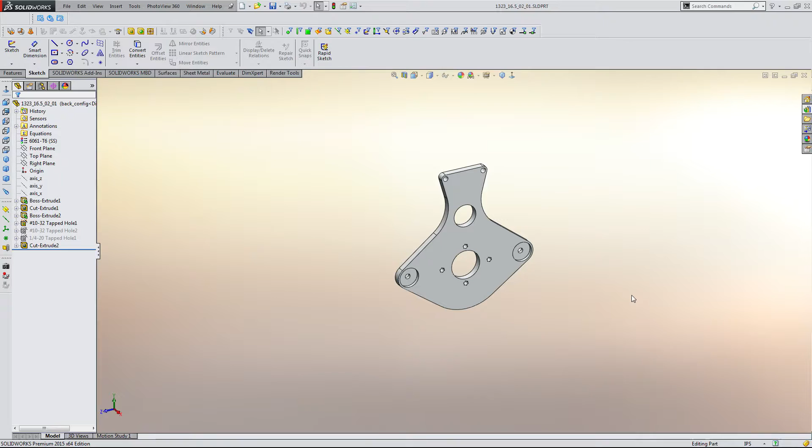I've taken a week or so break from this because I've been pretty busy, so I need to catch up on what we did last. I think, just judging by the fact that I haven't closed my SolidWorks window since then, we just made the gearbox plate. It's a Flipsim gearbox. Okay, yeah, now I remember. And next step is making the assembly. So I'm going to go make a new assembly.

If I remember correctly, I don't think I added the counter bores until after the video because I forgot about them completely. So what you see here is these little indents. Those are 0.755 diameter circles that were cut out by 1/8 of an inch in the 1/4 inch plate. What that accomplishes is our standoffs that will be holding two plates together are 3/4 inch outer diameter, so it fits in there pretty snugly and helps align the gearboxes and make sure everything fits nicely. It's a good practice we like to do.

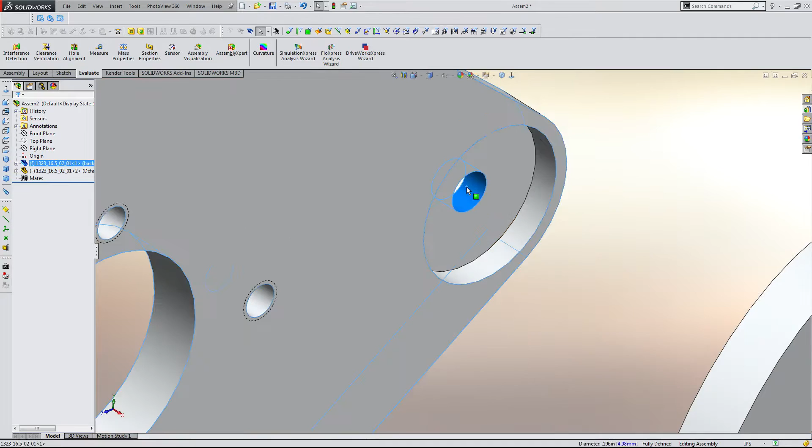I forgot to put it in the last video. I just remember very distinctly that I ended the video and I realized I didn't do it. I didn't have time to make a whole other video, so I just wanted to fix that real quick. So it's one of the few things where it's actually not in the video itself. My goal is to get the entire process within the video.

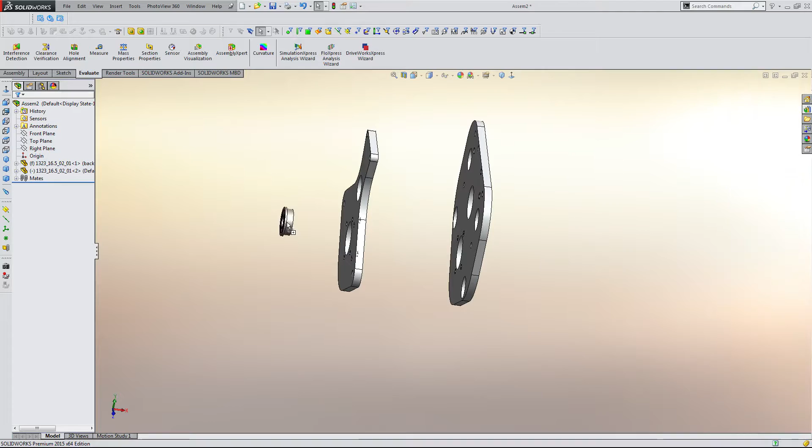Alright, so I get my plates aligned. I'm going to put my bearings in. Is that it? No. They are 3/8 ID, 7/8 inch OD. Cool. We can use a smaller bearing on the end because nothing's going to go through it. But we do need a larger bearing on this plate because the shaft is actually going to go through it. So you can have a 3/8 hex going through this bearing right here, and we're going to turn it down to 3/8 round so it can go in there.

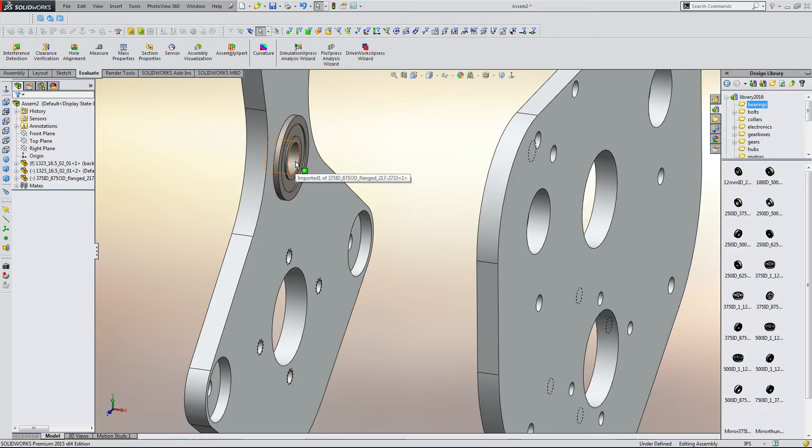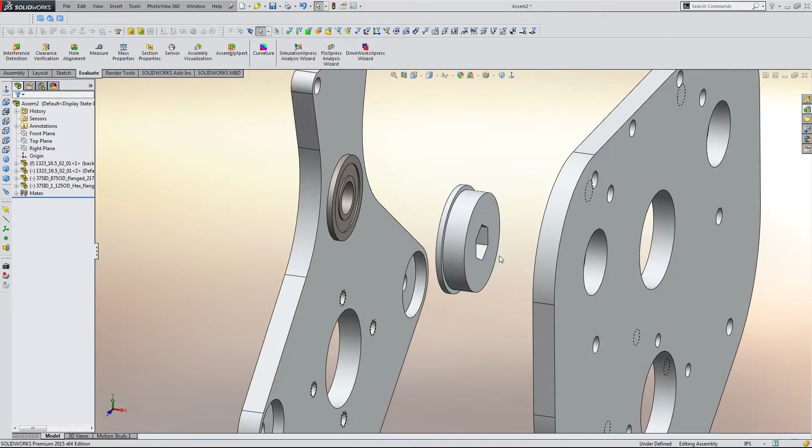Alright, now where's 3/8 hex? Oh, I wish there were 3/8 thunder hex. SolidWorks does a weird thing where it auto assumes the mates, which I guess could be useful, but not what I'm looking for. It's cool though, I can work with it. Also for aesthetics purposes, because I don't use that bearing that much, I haven't changed the color yet. I just like all my bearings looking the same.

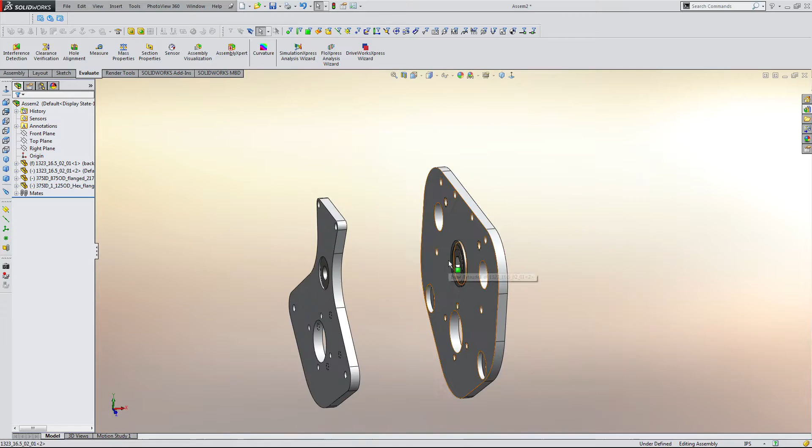Continuity purposes. So you noticed I put the flanges on the inside of the gearbox plates, and the reason is, butting up against this flange here, I'm going to have 3/8 hex going to 3/8 round, so the bearing can't go past the 3/8 hex, and that's going to geometrically retain the bearing over here. On this side, I'm going to have 3/8 hex going through 3/8 hex, and that's not going to retain the shaft or the bearing.

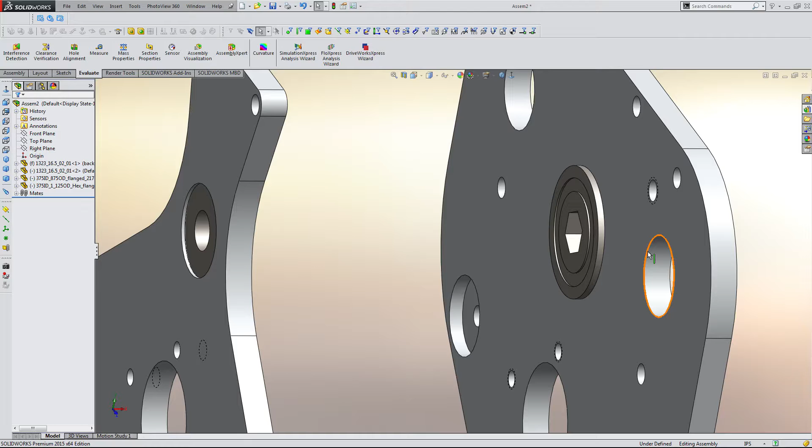So what I'm going to do is a snap ring or shaft collar, something super simple. I'm leaning towards snap ring because I think it can work. Just at the right distance, doing so will prevent the plates and the bearings from going any farther in, and the standoffs will prevent them from going any farther out. So that'll be a nice way to retain things. Alright, so bearings up there look pretty good.

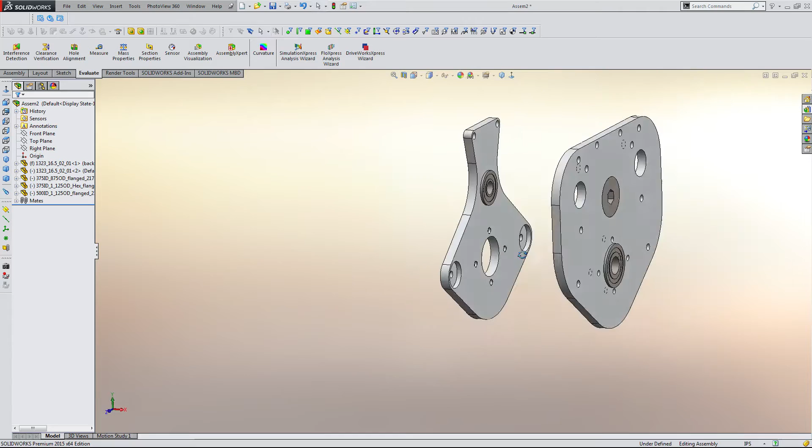On the bottom, I'm going to be running just a standard West Coast Products shifting shaft. So I'll have a 1/2 inch round on the bottom. And that second spot here actually won't have a bearing at all because that's where the bearing block is going to mount to. I'll be getting to that in a bit. But right now, let me get my gear set up. Or actually, I'll start with the shaft.

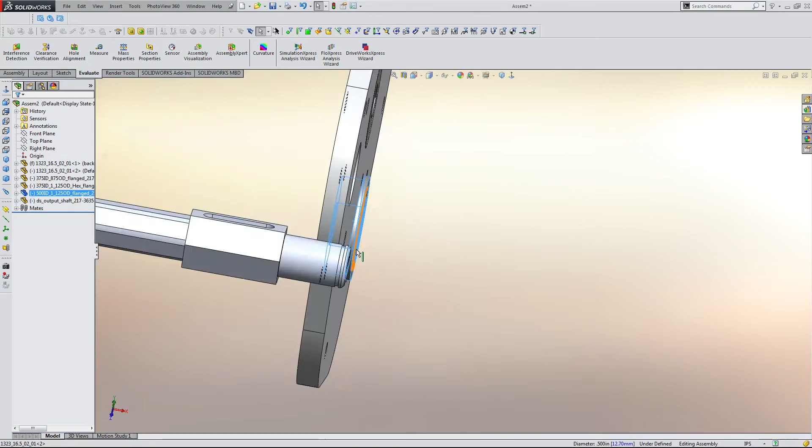Alright, cool. I'll start with basic thunder hex, and I'll cut it off later on. So there's the snap ring groove right there, and that's going to be just about coincident with that plate. I'll make those concentric. Now I need a 1/2 inch round bearing with no flange. Alright. Cool, radial.

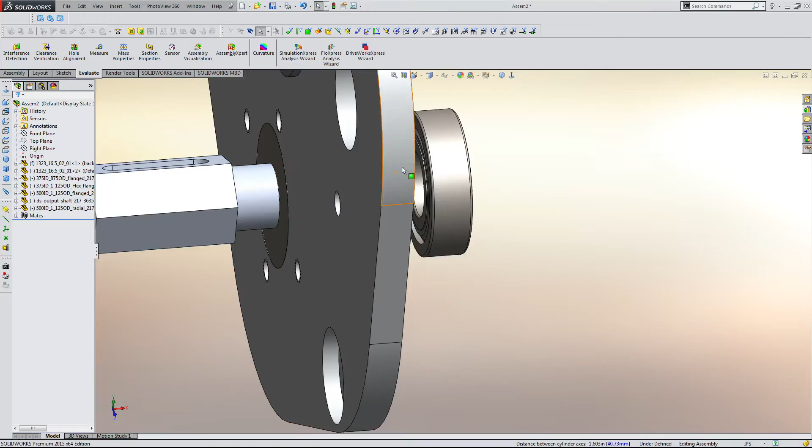That'll work nicely there. And there's a really thin washer that's supposed to go in here, which I should put there, it'll show it. So there's a little bit of space in there, it's a few thousandths. I'm not going to model it because I don't like doing that. But you can. Just know that it's there for a reason, and you do need it in your actual design.

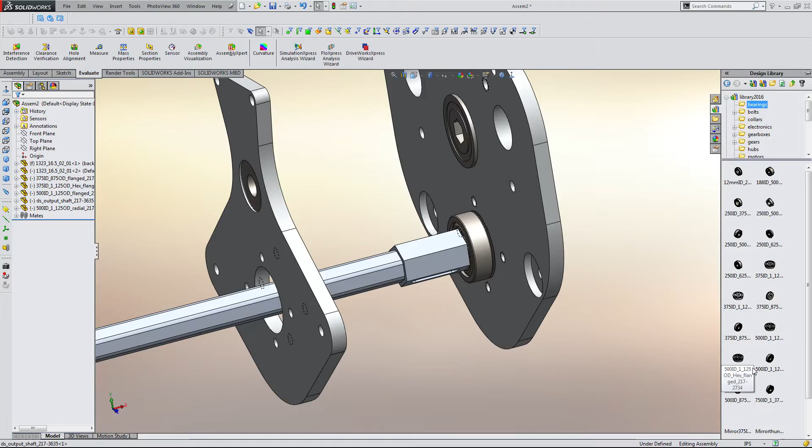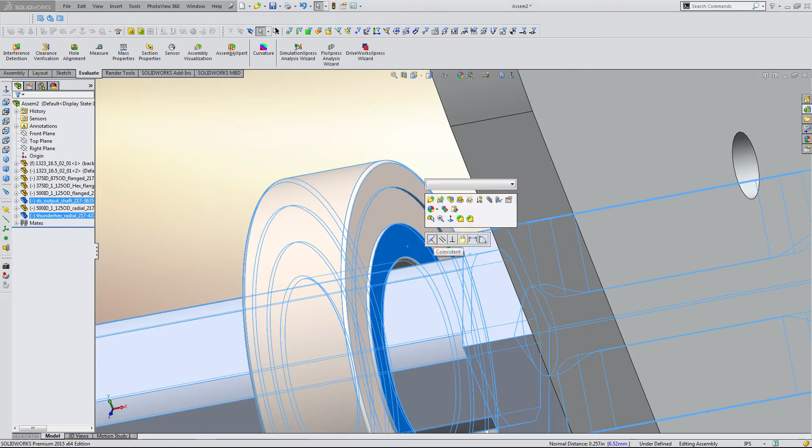Next, I have a radial thunder hex bearing. Most of the time, on traditional gearboxes, you'll use flanged half-inch hex because this is not normally thunder hex, the output shaft, but we would machine it to be thunder hex in this case because that's how I'd like it. That's going to let us use a thunder hex radial there and avoid a hex bearing. Try to use those as little as possible.

And now for gears, do we have... Okay, I do not have those saved. So from the last video, I determined I'm going to use the 54 and 64 tooth dog gears that 1323 used last season. Pretty sure those aren't going to be on the market. Just going to put that out here right now, so it's not like it will be a future COTS item. But I know my team's capabilities, and I know what we can machine, and I know that making a new dog gear out of any gear that we want is pretty easy for us. So I'm going to go pull those out.

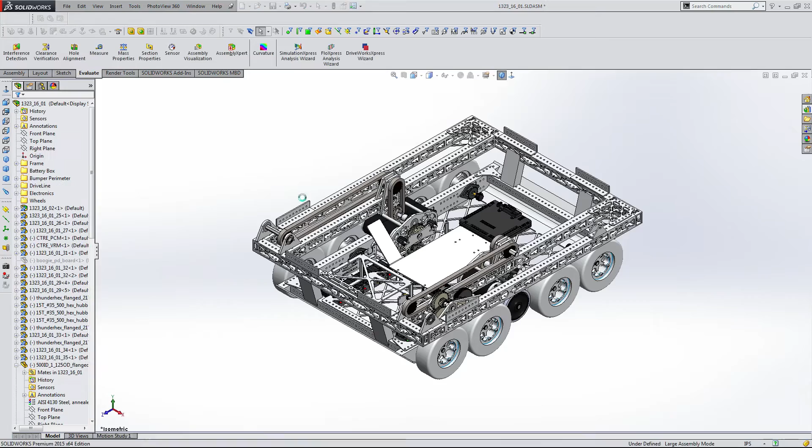Where is drivetrain? No, is it 01? I think it's 01. Nope, that's the entire drivetrain. Oh well. I'll just pull it from here. Little load. There it goes. So that's my 64 tooth. I'll just save that over to my project.

And because it is a custom part, I could use the actual name. Actually, there is a naming convention we have for modified COTS parts, and I'm going to stick with that just for continuity purposes. What I was going to do is just make it my own custom part number, and then I would know in the back of my head what it is. But if someone else wanted to look at the CAD and didn't understand what was going on, it'd probably be easier to keep this naming convention, which is why we use it on the team. So cool, that's going to be our 64 saved there.

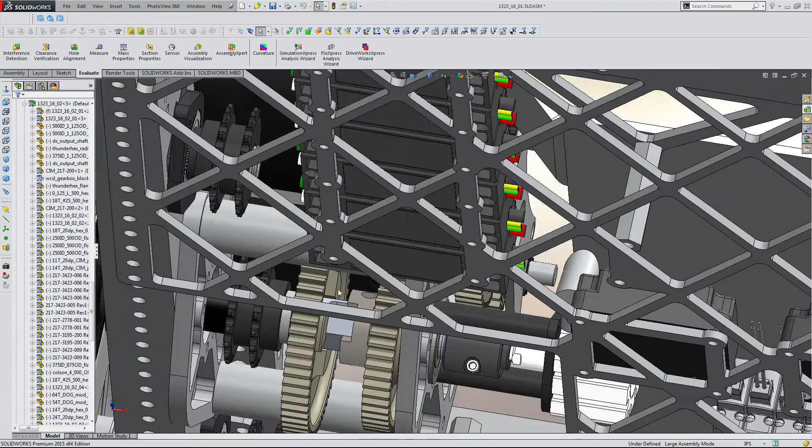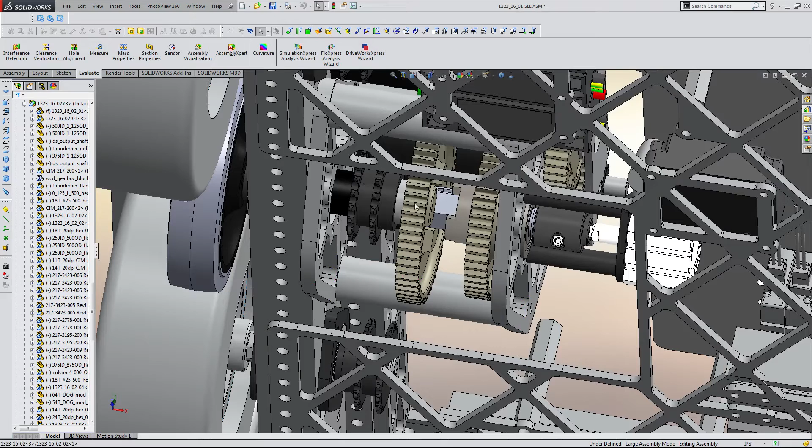And then do the 54 saved here. Let's see, off-season drivetrain, 02, everything good there, save, nice. Okay. So I think we're good here. Should be. Actually, one second. So this is really similar. I just want to see what's the spacing we used here. 2938. That's a weird number. We had a reason for spacing it like that. I think it's more because of our PTO on the top. So I'm gonna say I don't need to use that spacing.

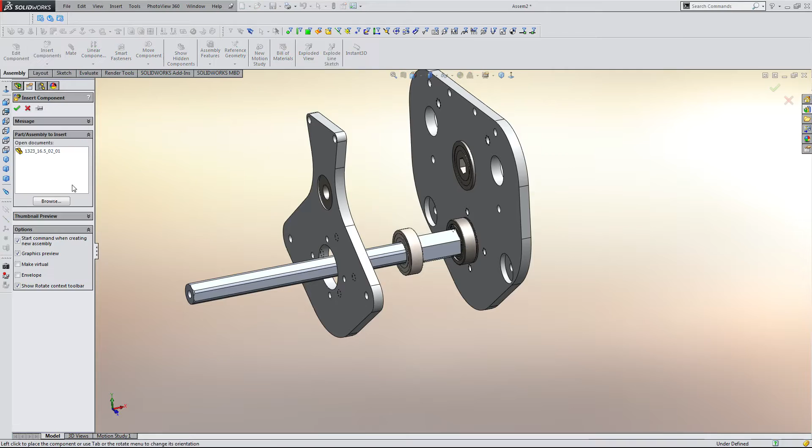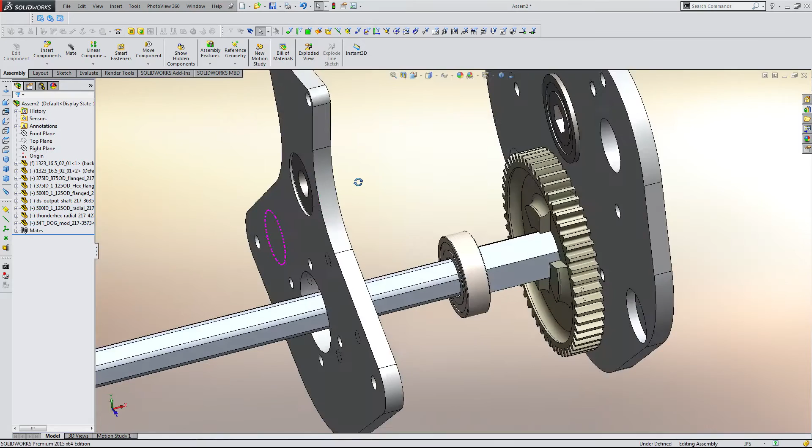I don't really know what spacing I'm going to have, but I don't need to know until I have everything figured out. So I'm going to insert my two dog gears. So put the 54 on the inside. And I believe the reason we put the large gear on the outside is because, depending on how you plumb your pneumatics, it makes your default gear high gear, so that when you're pushing your robot on the ground, you're not pushing against a larger reduction. That sounds right.

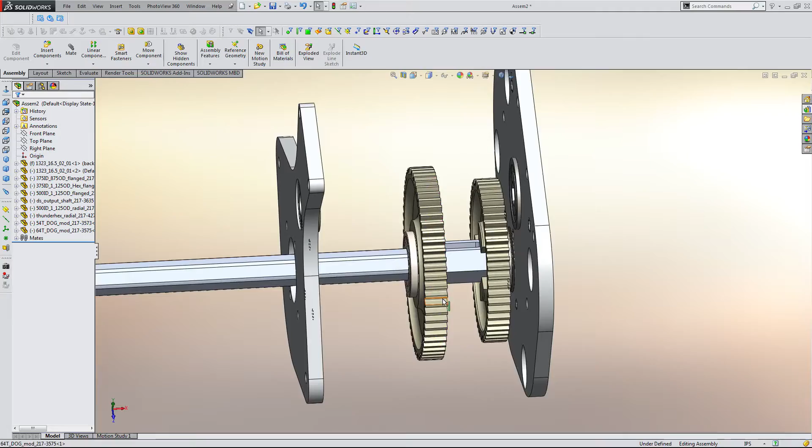Plus, I think it just packages it a little better for a lot of the stuff we do here. So those are our two dog gears, or dog pattern gears. Normally we'd have the actual shifting dog in the middle. I don't model it. I just know how big it is and if anything would get in the way. There would be nothing in this model that'll get in the way. If you want to model it, that's up to you. There's no harm in doing so, but I don't see a need to do it.

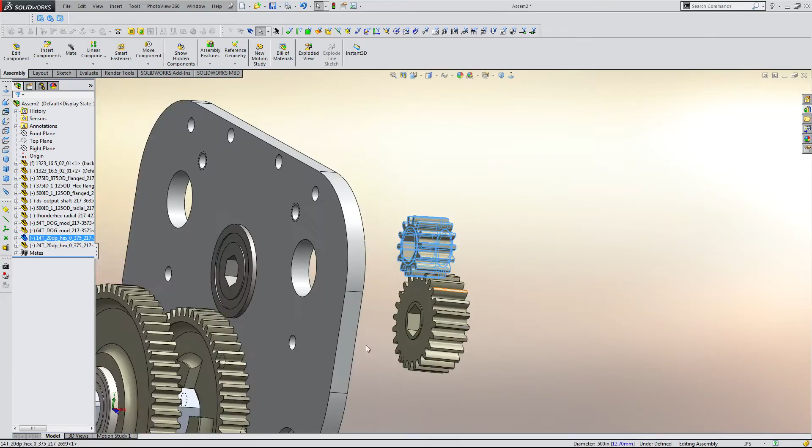So now we go to our 3/8 gears, pull out the hex, 375, 14 tooth, and the 24. I believe that's what we used. They seem off color, or maybe these are the right color and those aren't. Maybe they're all the same color, and I'm colorblind. Cannot tell yet. Okay. So just because mating round with round is a lot easier, I'll mate the inner part of the bearing with those spacers right there. And then I'll just drag these to approximately the right places.

And I know that there's going to be a 3/8 snap ring holding this together. So just for purposes of spacing wise. So yeah, 3/8 snap ring. Let me check McMaster. I think it's an 0.020 thickness. Gonna double check though.

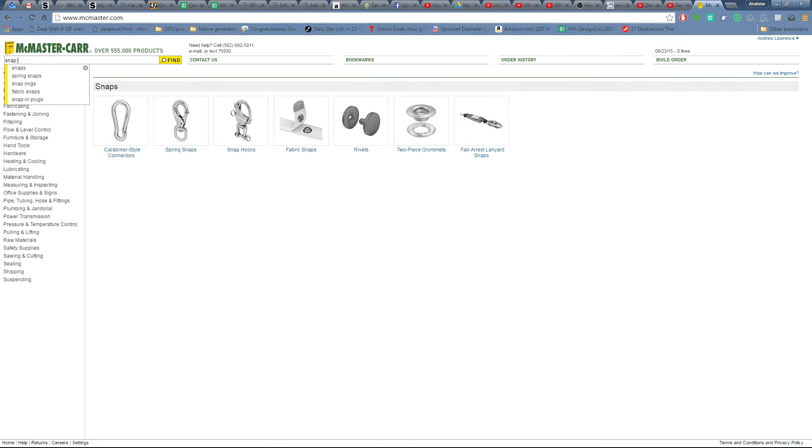Let's see. I don't think you can see this. I think I don't have it set up where you can only see my SolidWorks window. So if you're not watching with sound, which I don't know why you would do, but if you're not watching with sound, you see nothing going on. That's probably why, because you're not seeing the right window. But then again, if you're not watching with sound, you can't hear this explanation either. So yeah, it's not too helpful.

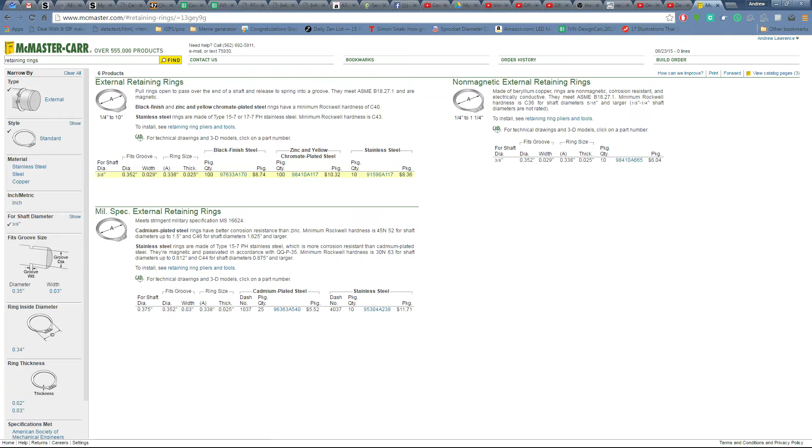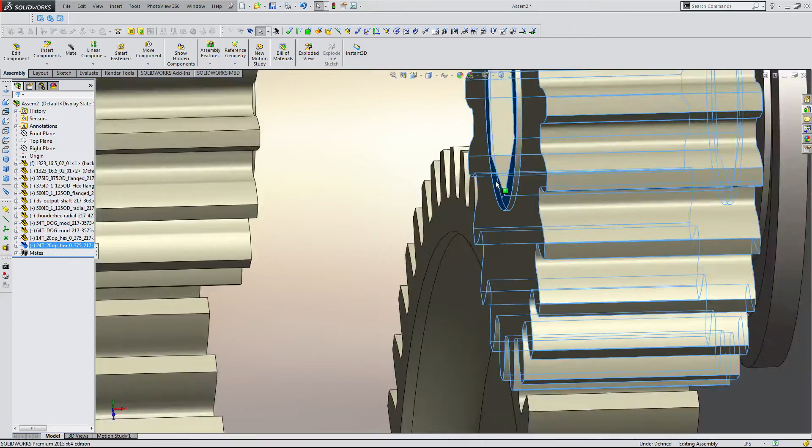Okay, so I was wrong. It's 0.030 for 3/8 snap rings. So I'm going to space this 30 thousandths off from the edge, which will work out pretty nicely for me. And now I'm going to see how far is this approximately, because if I can, I'd like to just use a spacer that already exists there. So it's at 0.574. I could probably just use a 1/2 inch spacer, because those are already readily available.

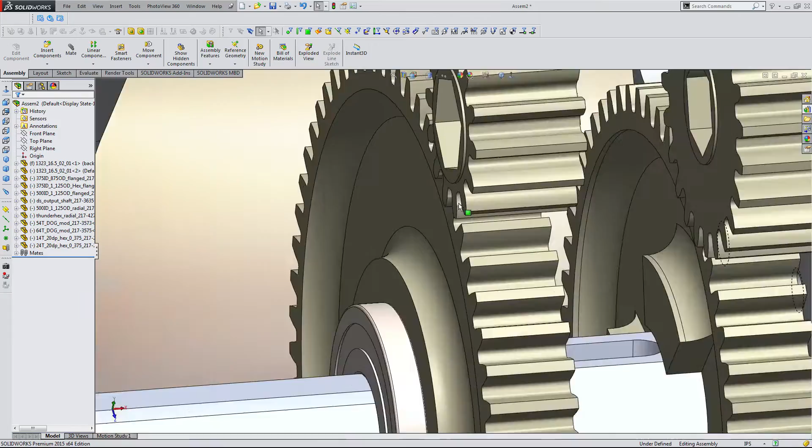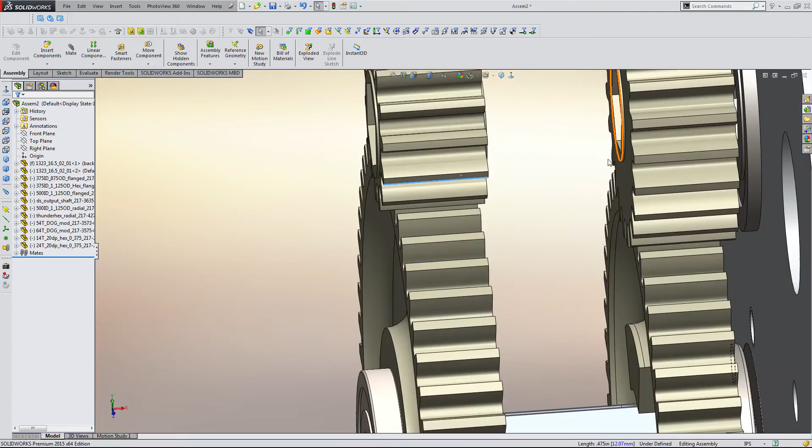Not as much contact as I'd like, I'll be honest. So what I'll do instead is I'll see how far it is from here. No, actually, I don't want to see how far it is from here. That's dumb. I want to make this off of the gear that already exists, because right now I don't know what my distances are. I don't know where this is relative to that plate. So if I don't know that, I need to make this relative to this. So I'll say 0.6. Yeah, seems good to me.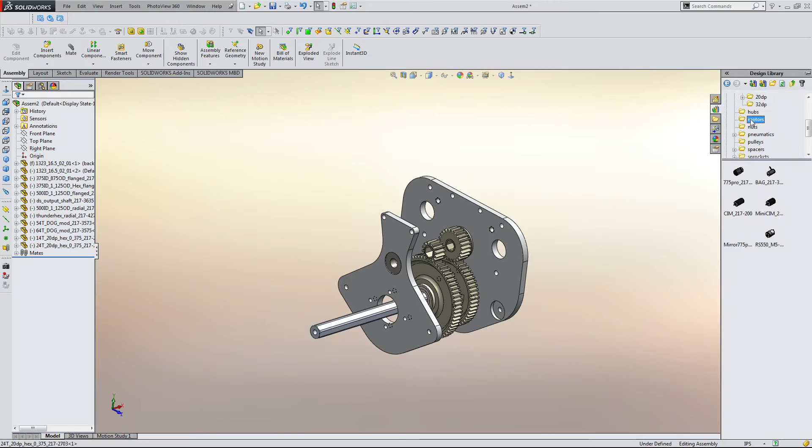Alright, so I have my 3/8 gears. Now just to make sure I did my math right in my modeling, I'm going to put in a motor. Get a CIM. And if I did this right, which I'm hoping I did, there should be enough room for my 2 gears on the inside. Alright, that's nice. Cool, exactly as I modeled it. So we do have a nice bit of space right in here, so our gears will not contact our motors.

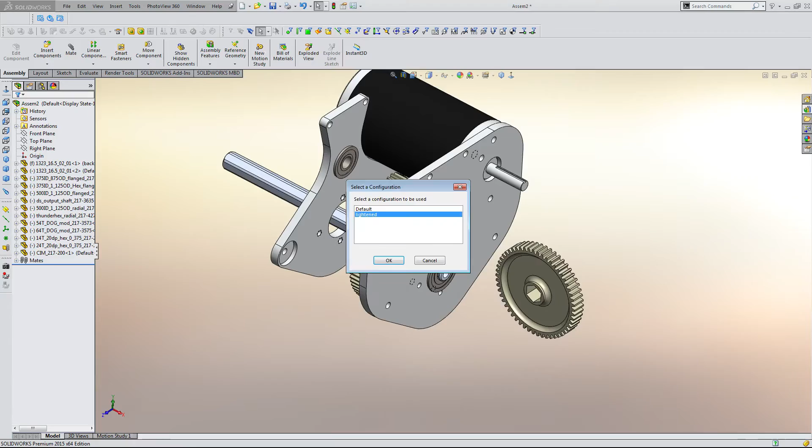Let's see, now on the outside, 20 DP. I'm going to go to 1/2 inch hex, and this is going to be a 54 tooth gear. Ooh, I have a lightened model? That's nice. Forget when I do that to myself. Alright, make it concentric there. And I'll just make it coincident there. That's usually pretty fine.

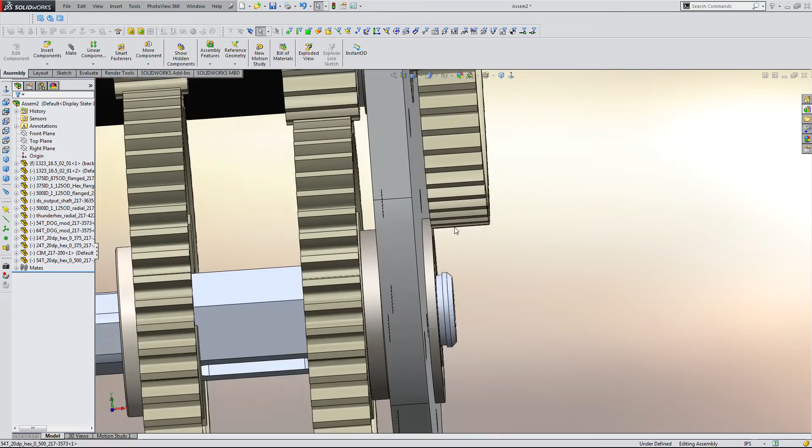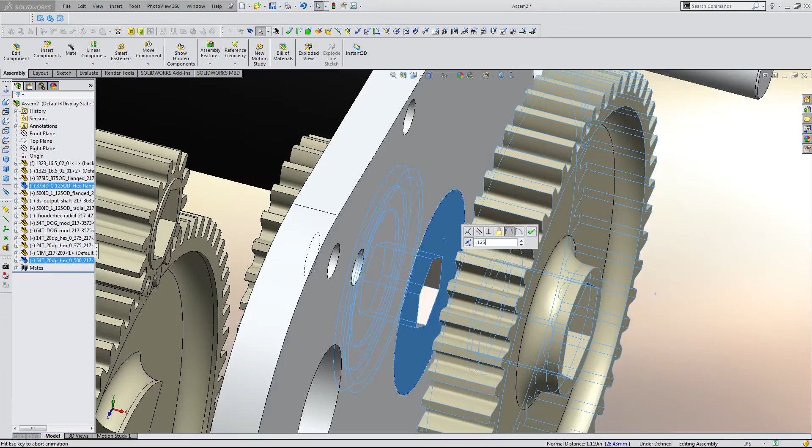Okay, but that would interfere there. So, cannot do that. Plus, that would move the bearing, or not the bearing, but the bolt that holds in that bearing. Or now there is no bearing holding in that bolt. No, is there? There should be. Yes, there's bearings. Okay, I'm confusing myself. So, I'm going to put this out some trivial amount, like, I'll put it out 1/8 of an inch. I'll have a spacer there, of course, but that is enough to clear there. It's more than enough, and I'm hoping that I can put a bolt head there.

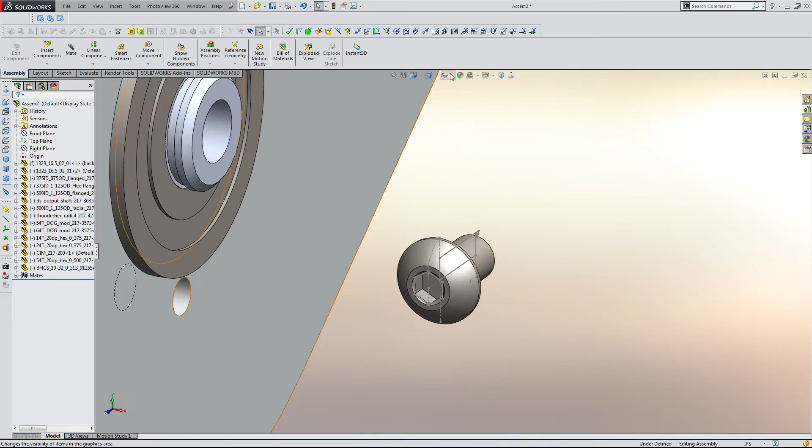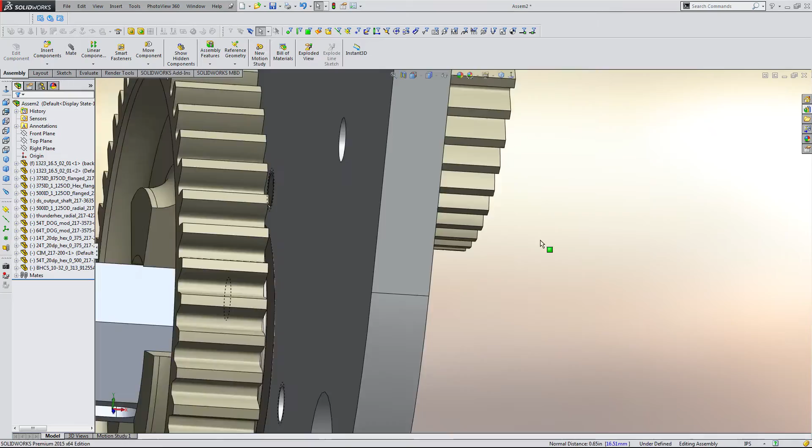So to show you what I mean by the bolt heads, I think I showed an example on the WCP DS previously, but I know the thickness of this flange is about 1/16 of an inch. So if I go to my number 10 button head cap screw bolts, I go to my 5/16 length. Okay, oh, it's too long, definitely too long. There it is. Cool. I don't know why it shows the sketch. I should be able to put that on top. Oh, whoops. I put the button head there.

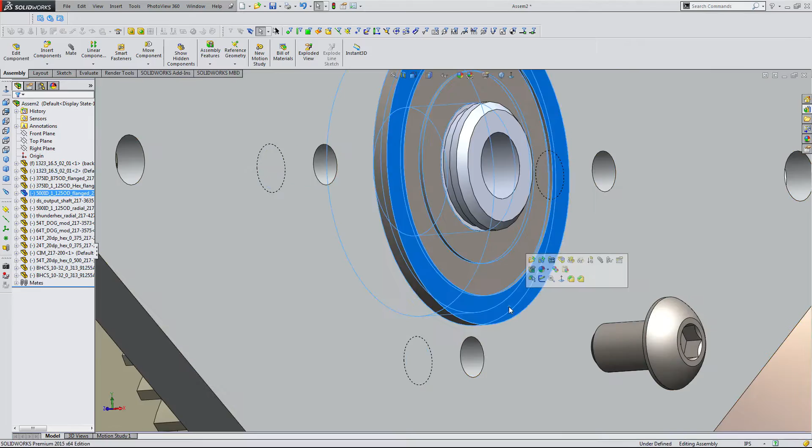Cool. So you're seeing the bolt is holding in the flange. It is not contacting the gear, and it's not protruding out the other side. Awesome. So I'm going to get another one of those and do the same thing on the bottom. Normally I've done 3. I think we can get away with 2 though. I think it's fine. Alright, anywhere else where I need to do that trick? I don't think so. No. Cool. So that works. So that's held in. Our gear's pretty positioned nicely there.

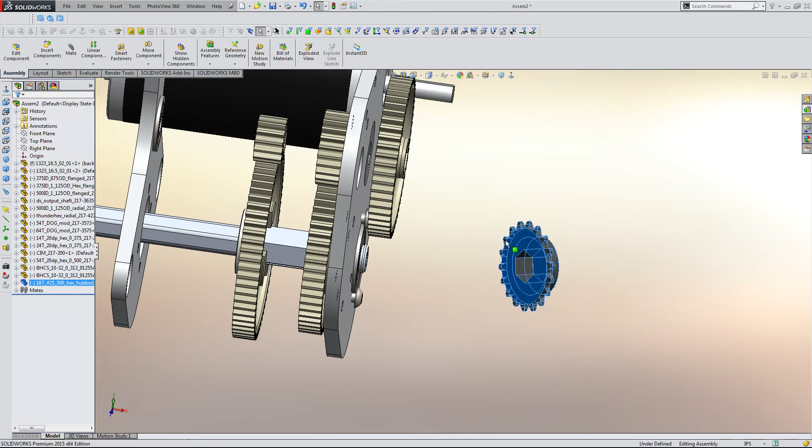Now we need to figure out our sprockets. So sprocket wise, I'm going to use number 25 sprockets, and then WCP hub sprockets, probably 18T, because that's really all we need here. You can go larger and it works. That's not too necessary. If you go smaller though, you run the risk of stuff popping off or not nice tension. So I like 18s. That's what we use on 1323. So I'll just keep doing that.

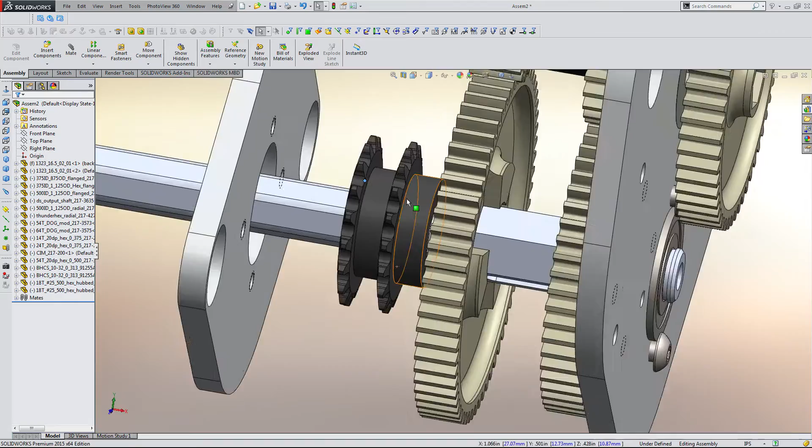Now as for where they are, they need to be a little bit off from this distance right here. But I need to fit the chain in as close as possible. So what I'm going to do, let me see, is I'm going to model my number 25 chain.

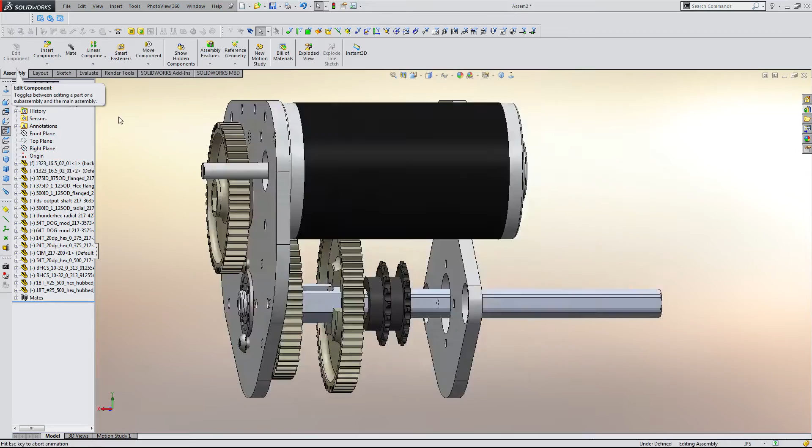I'm going to do this by going to the right plane. I'm going to start a sketch. Nope, just kidding, not the right plane. Should have been the top plane. Or front plane, that's it. There I go, cool. I'm going to draw a sketch right in the middle there. The height doesn't matter, which is why I can put it right in the middle of that tooth right there. What I care about is the width.

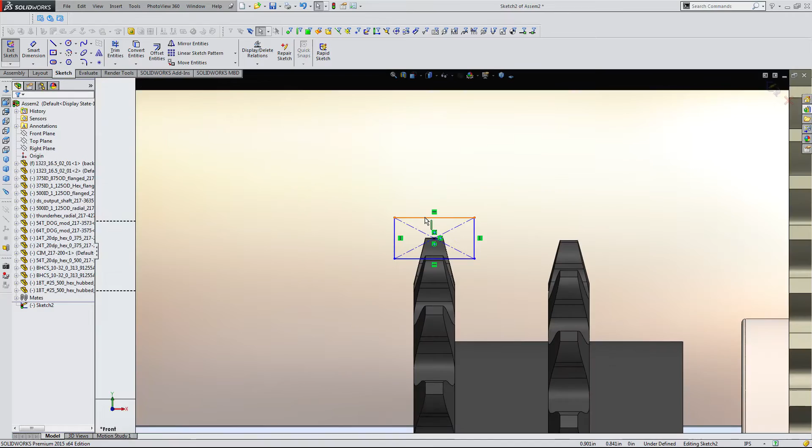So now I'm going to go online and check the thickness of the chain. I do that by going to Vex's website, because Vex Pro has their own. They sell chain there, and I think that's where we get most of our chain. And they have nice drawings. So if we go to their sprockets and chain section, it'll say roller chain. And I know you can't see this, that's why I'm saying it out loud. Scroll down to the technical specifications and say drawings.

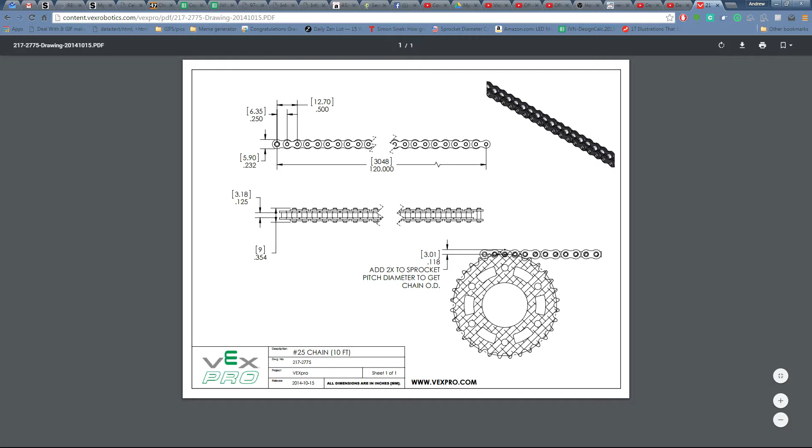And number 25 roller chain. Alright, and there is a thickness there set as 9 millimeters. Let's see. I think that's the correct chain that I'm using. Yeah. So I'll model this as 9 millimeters. I'll just denote that. My default is in inches, so if I just say 9, it's going to be 9 inches. I just put mm and I'll say millimeters. And the height I don't actually care about.

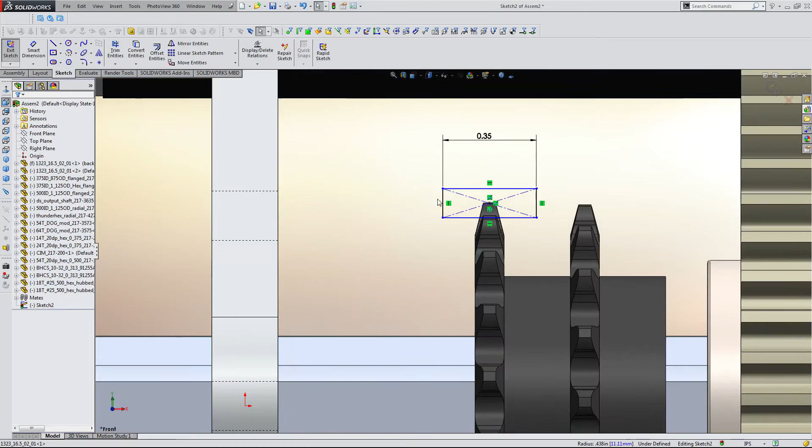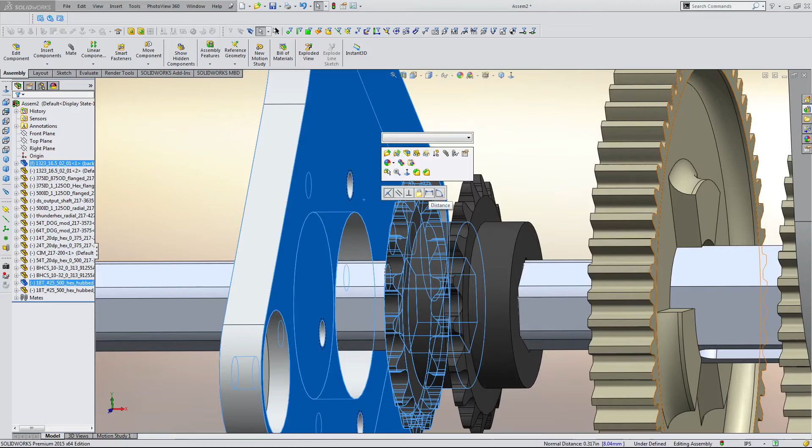So now, my goal is to make sure that, let's say, where's this face? 0.12. So I need to have at least an 1/8 inch of space between the front of this sprocket plate right here and this side plate. So that's just at least that distance, preferably more. So I'm thinking 3/16. Thinking if I have a 3/16 inch distance, that will be plenty. 0.1875. Okay, cool. So I've done my modeling, I've seen my sketch, I know exactly how much room I have for my chain, and I know as a fact of science that this will work.

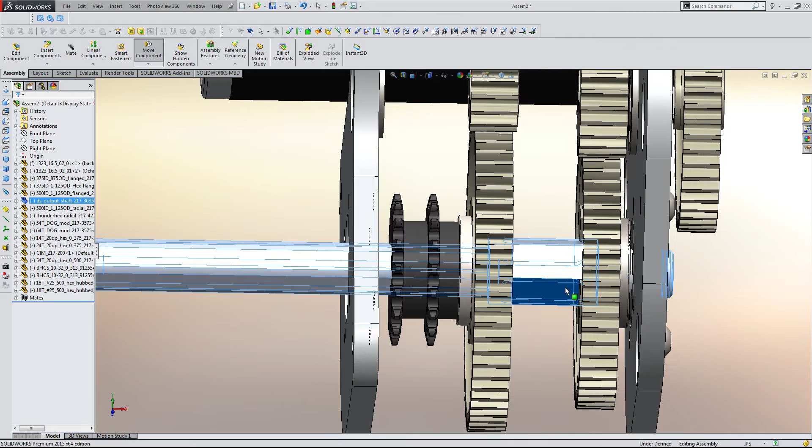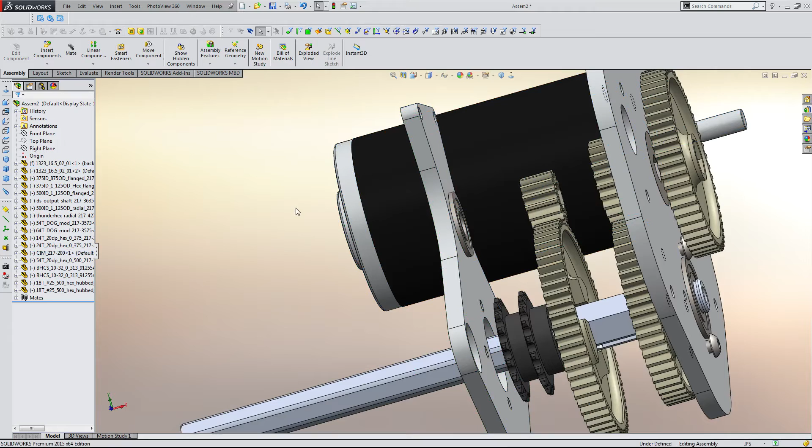Now, as for how far this can go, this could, in theory, just butt up right against the sprocket. However, I do have a wheel, a motor sticking out, and it's sticking out quite a bit. Actually, it's sticking out, how far is this? 1.5 inches. So I know that this is going to be hanging over 1-inch tube. And then there's going to be a wheel at the end. I don't want my motor to intersect with my wheel, and I want room for my wires. So how do I know how far this can go out?

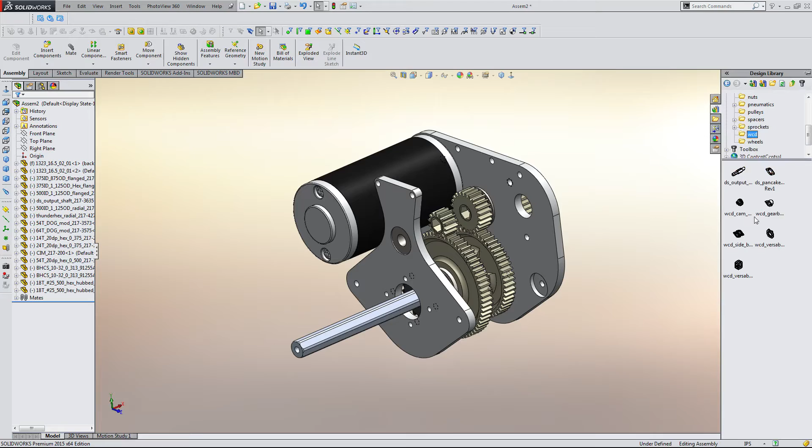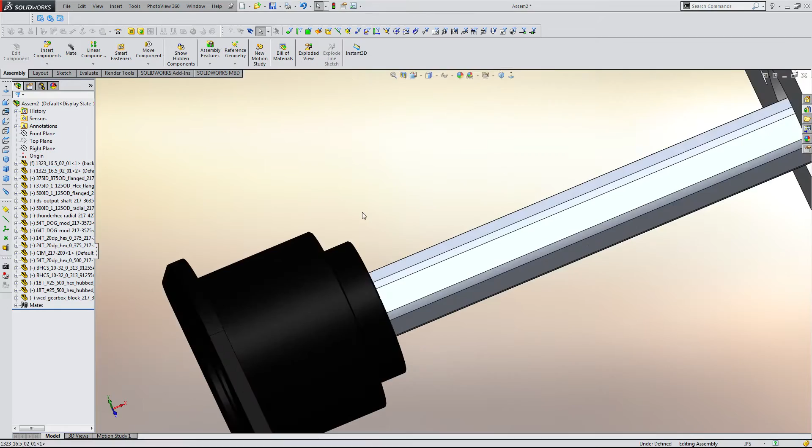And the way I do that is I start adding in my bearing block and my wheel. So I have a folder that says WCD, it's all my West Coast Drive stuff. I'll get my bearing block. I will attach that via the 2 mounting points here on the other side. And what a lot of people do, and what I initially did, is just mating this face to that face, but this is actually a little bit shorter than 1 inch, and that's designed so you can clamp it on. So just for mating purposes, I'll say there's a distance mate of 1 inch right there.

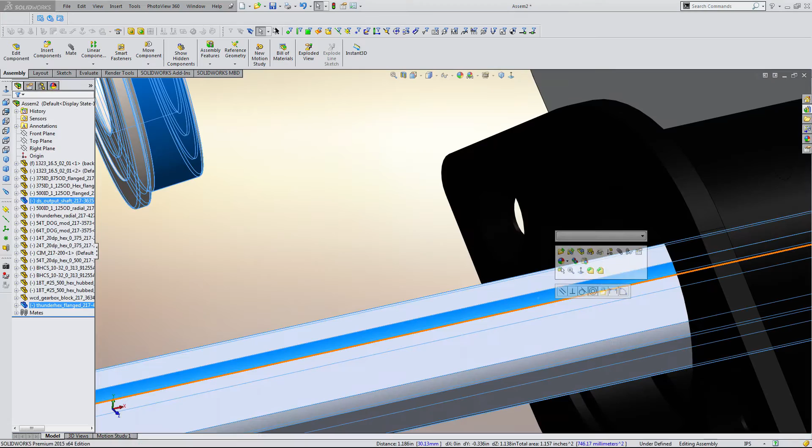Bearing, I'll go put a Thunder Hex bearing in there. And it has a flanged Thunder Hex bearing. Alright, and there's a flange part in there that I have the pretty nice colors, which makes it sometimes hard to see if you use black. Actually, I usually like to use this color, black, and I'm not sure why the bearing block isn't that. So that makes things at least easier to see.

So you can already see where the edge of my tube is, and then the 1/8 inch from the bearing block adds in a little bit of space. And if I go to my wheels, I think if I remember correctly, I added my new wheel into my library just to make sure. Yeah, I did. Cool.

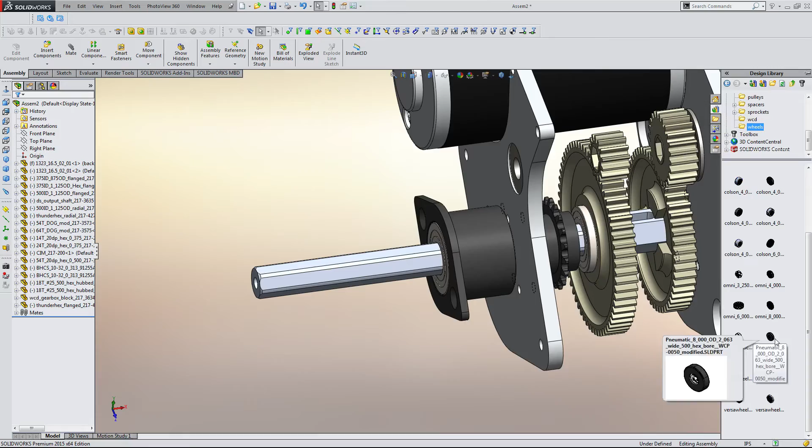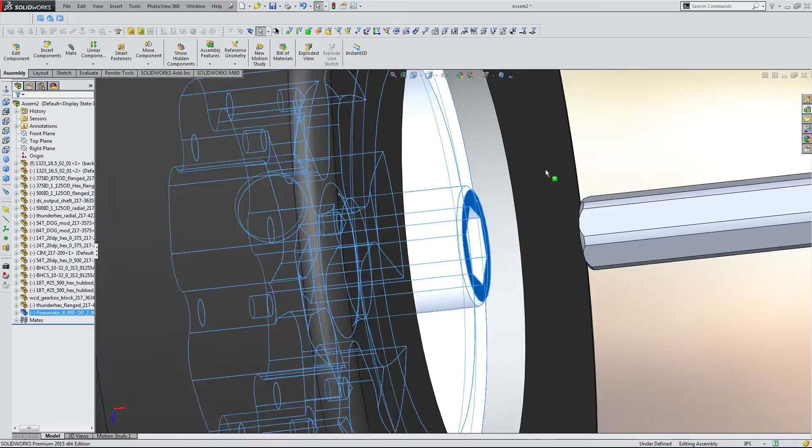So I'm just going to make that concentric there, and I'm going to mate this to the end here. Let me check my actual drivetrain model, just to make sure that I didn't add a spacer. If I add a spacer, I'd like to do that as well. Oops. Check 01. No, I think, yeah, I just butted it right up against there, which is fine. It's designed with that little nub for that purpose. I just like consistency. So I'll butt that right up against there, and you can see that CIM is too close.

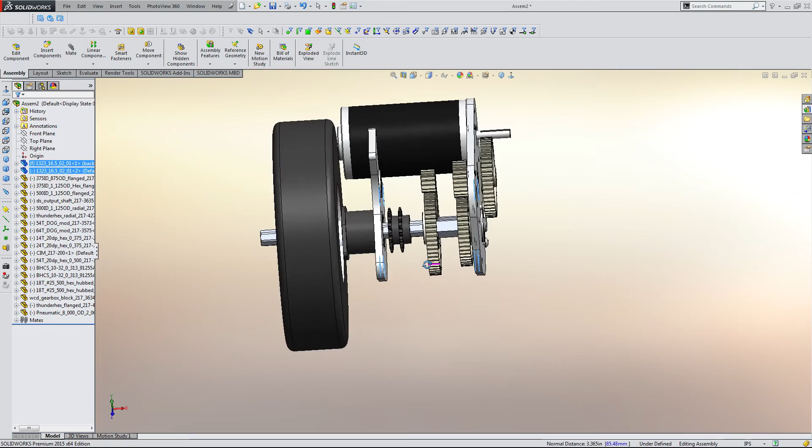So let me see, what's this distance right here? I always like really clean numbers. It really doesn't matter. 3.365. Okay. So I'm going to make this 3 3/8, which is the same amount of significant figures as any 3 decimal place number, but 3/8 is a nice fraction, so I'm going to do that instead. So that's going to be my spacing for the most part.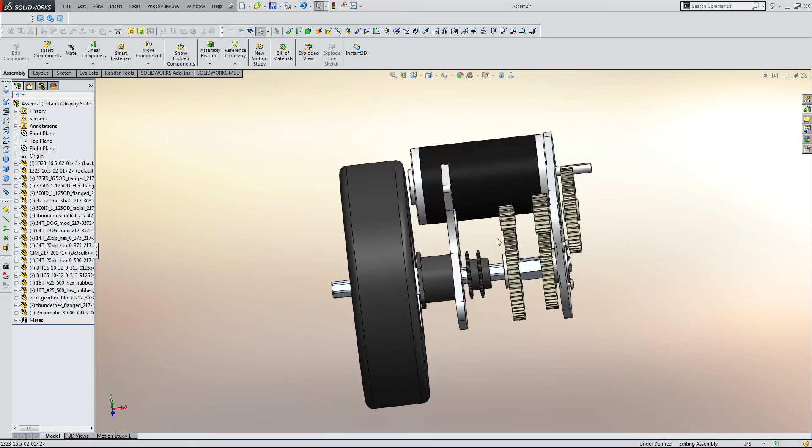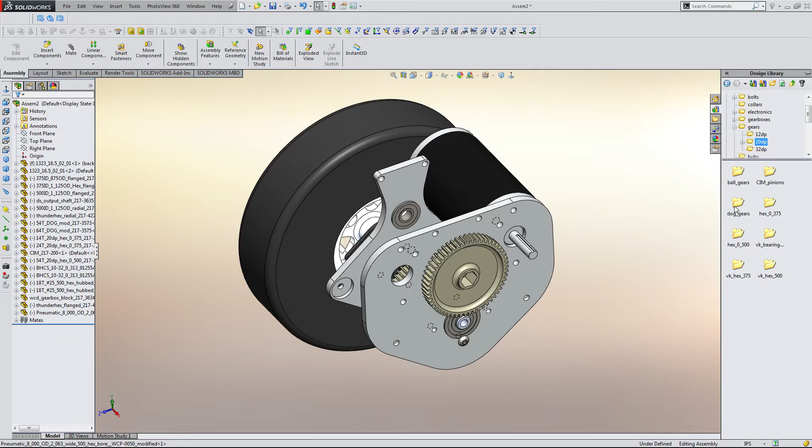Now let me get the rest of the gears in place. Actually, let me do a quick, no, I'll do a quick mirror later. I'm going to go back, and I specifically designed this to use the 11T pinions. It gives me the ratio I'd like, and I'm just going to make that concentric there. For distance, that looked good. Really doesn't matter. It could even be inside for all I care, because it's small enough. But for all intents and purposes, the distance does not matter, as long as it's not way out here. If there's contact being made, there's contact being made, and that's all I care about. So I wouldn't even mate it.

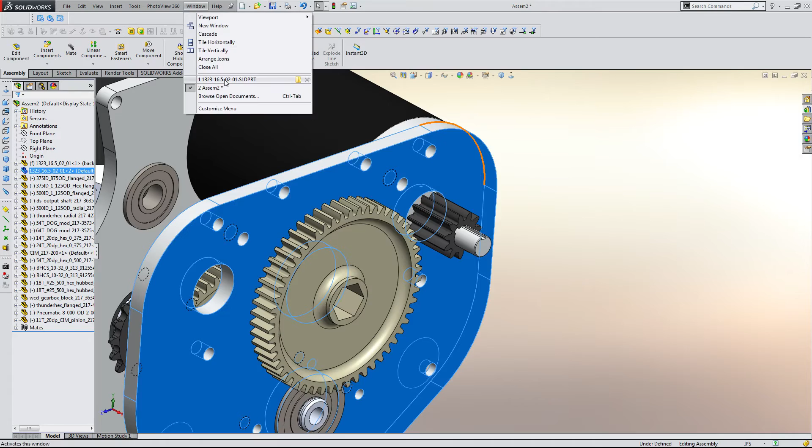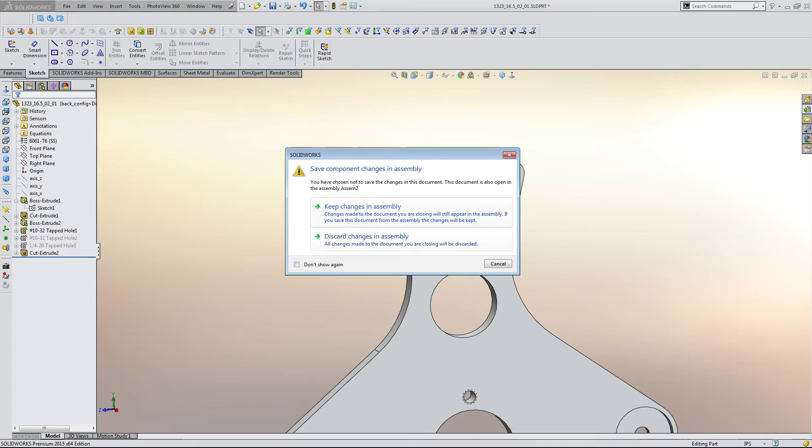Now, as for the other gear, I actually completely forget what gear I used as an idler, so I'm going to go double check that in my sketch. 54, and okay, so I used a 20 tooth. Okay, discard changes. I haven't made any changes. So I'm going to get a 1/2 inch 20 tooth gear. And the way I would make my idler work is, if I go to my bearings folder, I have a bearing that's a 1/4 inch inner diameter and a 1/2 inch outer diameter, and it's flanged.

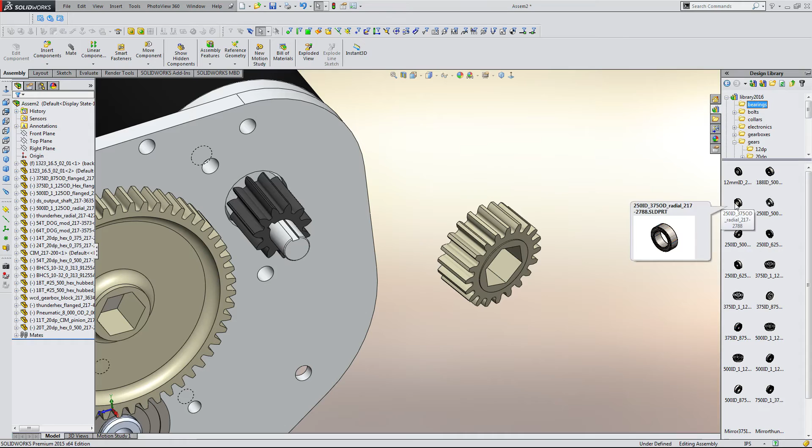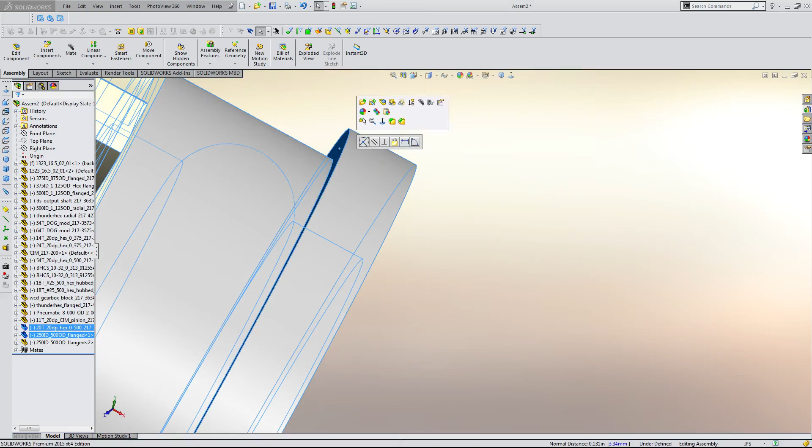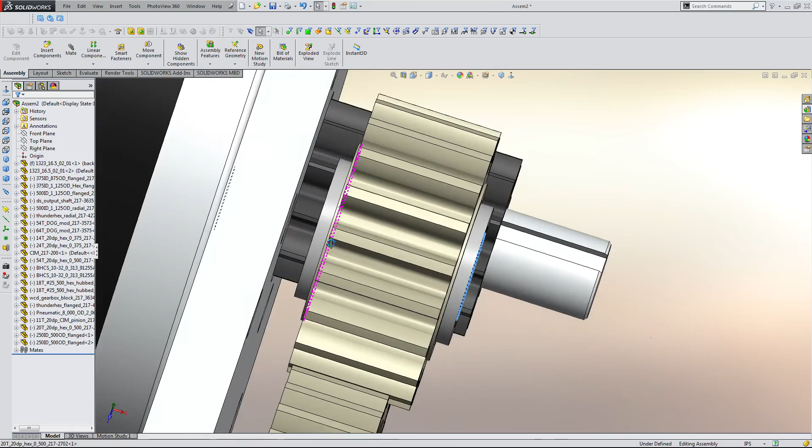Here it is. Cool. This is what we used in season on 1323's robot. These are nice because I could just cup them right between, right over there. Because it's a 1/2 inch round outer diameter, and a 1/2 inch hex bore in the gear, it actually slides right in, and it supports it surprisingly well. So I put one on either side. The mistake we made this year is we just bolted it through right here, and we had nothing on the other side, and I think that decreased performance a little. So our solution would be to add another plate on the outside to support it. I think I'm going to make some simple sheet part that'll go off the mounting holes here and here, and the hole right here, and that goes to either side.

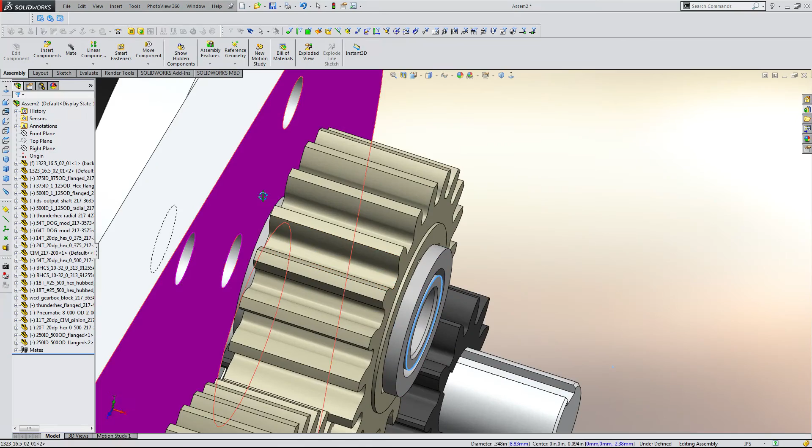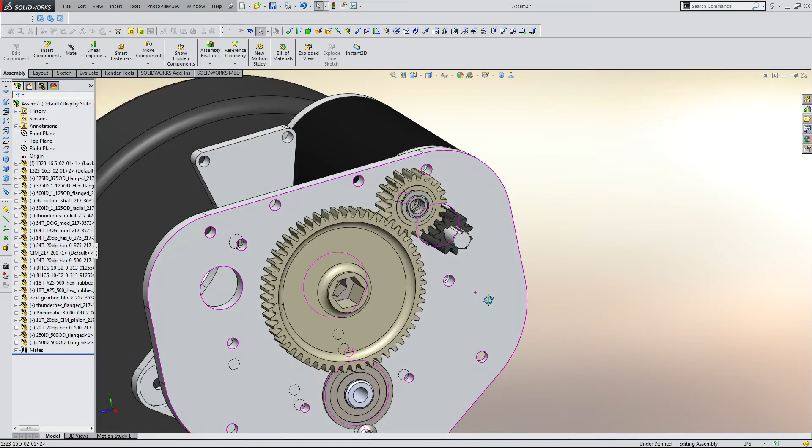So distance wise, I think I still have this an 1/8 inch off. What do I have? 0.185. And that's going to connect nicely there. Actually, a normal distance there, so I will change that to be a 1/16. Okay, so that's nicely in the center there. That's better. Cool. So I'm just going to mirror that to the other side now, not across my right plane, across my front plane.

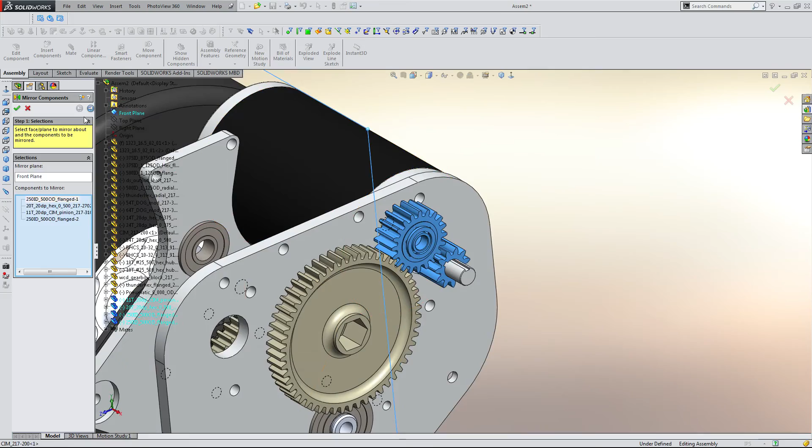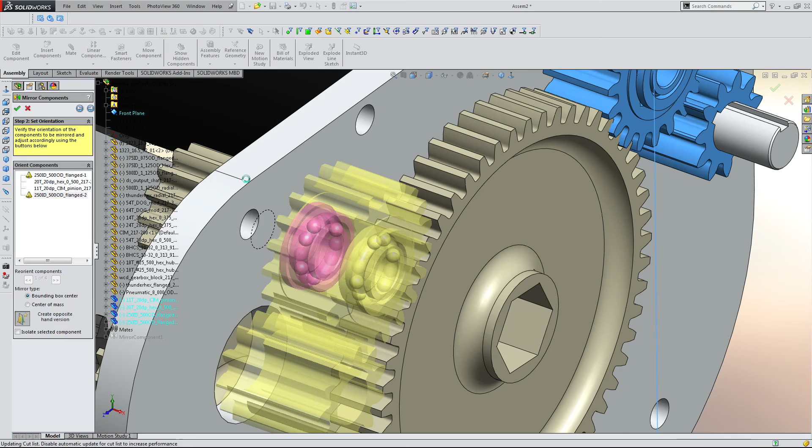Alright, so this is most of the guts of the gearbox. It's a terrible way of saying it. And those bearings flipped. Did they? Yeah, they totally did. So we had a slight problem with the mirror where the bearings flipped. That's fine. I'll just fix it by making the right hand feature. And the other bearing is there. I'm blind. Okay, cool. So that's going to work out nicely for us. We're running a bit close on time, about half an hour already. This is most of the gearbox right here. Oh, got to mirror the motor, actually. I forgot about that. Nice.

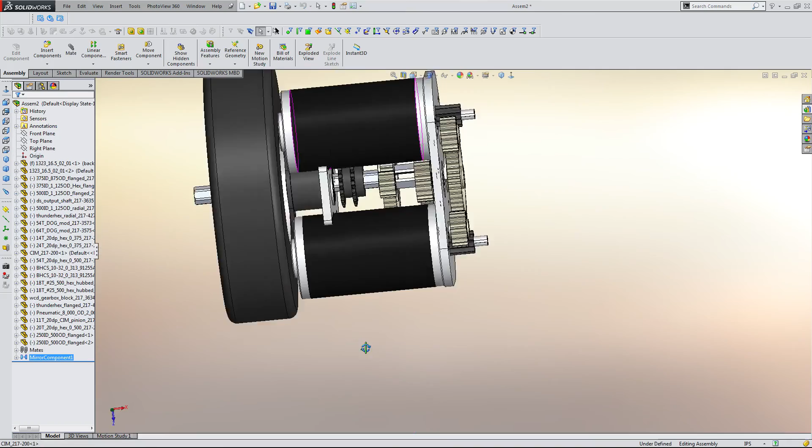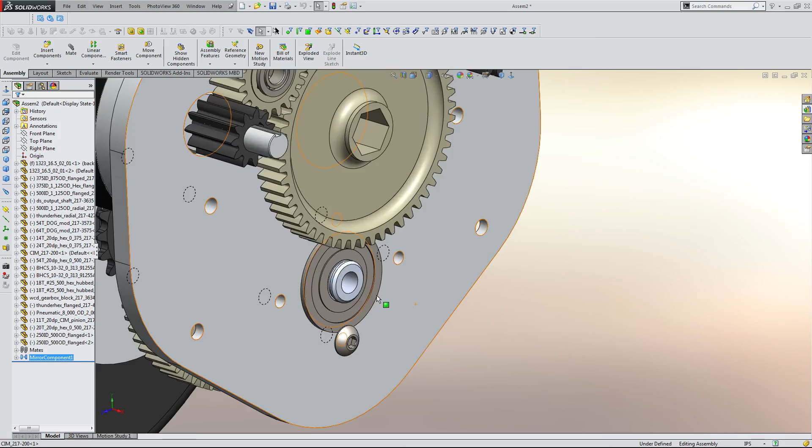So this is it. For the most part, it's missing standoffs, it's missing some spacers. It's missing a shaft. Kind of helpful. But other than that, that's the main idea of it. That's the nitty-gritty. In the next video, we'll finish it up, start putting it in the drivetrain. We'll get some lightening done. Also get a shifting shaft in there, like a pneumatic cylinder. It'd be nice if your shifting transmission could actually shift.